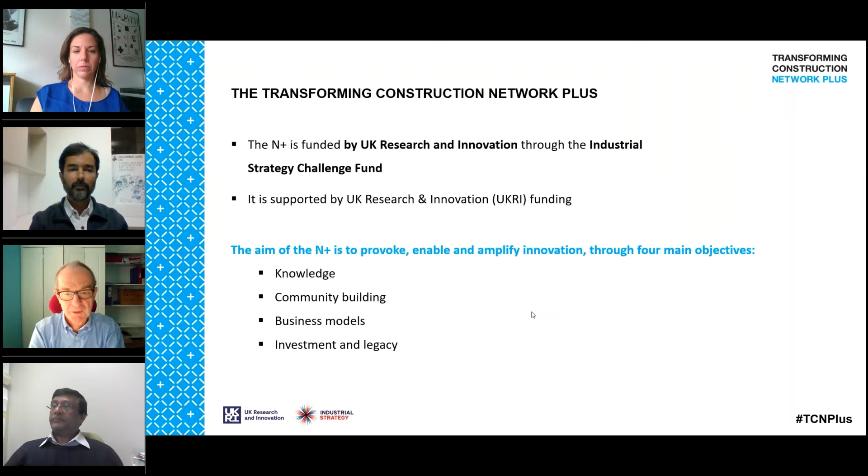So our webinar today is looking at the international experience around off-site construction and energy efficiency. And we have three speakers: Dr Thaleia Konstantinou from TU Delft in the Netherlands, Professor Deo Prasad from the University of New South Wales, and Dr Malay Dave, who is also from the University of New South Wales in Australia.

So without further ado, what I'd like to do now is introduce you to our first speaker. Dr Thaleia Konstantinou is an assistant professor and chair of building product innovation at the Department of Architectural Engineering, the Faculty of Architecture at Delft University. She studied architecture and qualified as an architect at the University of Athens, and she undertook her PhD at TU Delft. Her research topic is facade refurbishment and strategies, and she's currently looking at energy efficiency, the circular economy, and facade design, construction and industrialization. So at this point, I'd like to hand over to Thaleia to take us through her presentation. Thaleia, you have 20 minutes, and I'll give you a 3-minute warning.

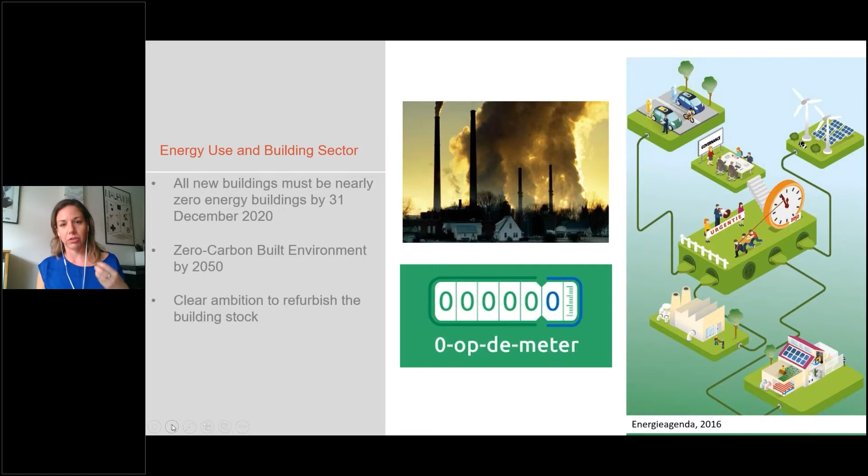And with this context, there's a clear ambition to look at the building stock, at the existing building stock. The reason for that is because we cannot really decarbonize the whole building stock if we do not look at the existing buildings, given that only 1% is added to the stock every year. This means that by 2050, when we want this to be basically not consuming any energy, only 30% of the stock can have the standard that we set now, while 70% is already there, and it has far lower energy standards. And that's what those graphs are showing.

That's a graph I really like. It shows that basically 80% of the buildings have outdated glazing, so less than 20% of the buildings have high performance double or triple glazing. And that's another graph showing the energy label distribution in the Netherlands. I wouldn't be surprised if the situation is similar in other European countries. It shows how the majority, for example, of buildings built in the post-war period, that's the blue bars, have a label of D or lower.

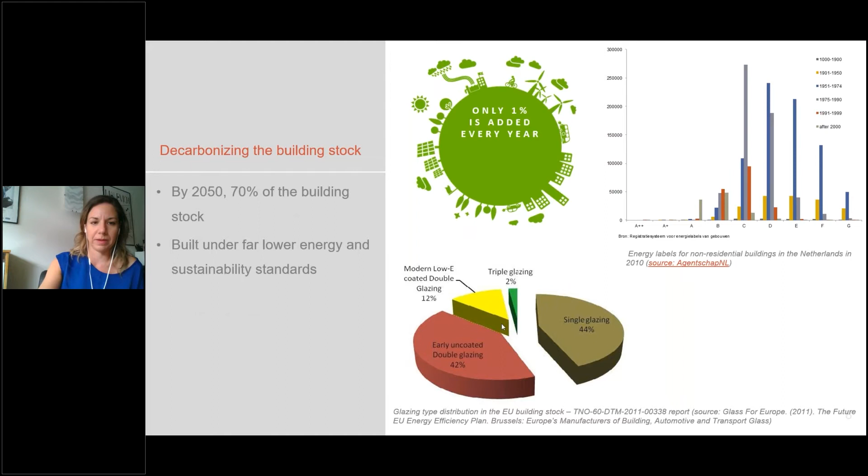Speaking of the stock, just to understand a little bit the age of the stock, because that's a decisive factor of the condition that it has: in the Netherlands, 1/3 of the stock is built in the post-war period. That's why it's an important period to look at. In the UK, this graph includes both countries, which I found interesting. The actual numbers are a little bit less, but still it's a very big percentage of the stock that is in this period.

The post-war building stock has been the focus in this refurbishment discussion, but we should also think that the next period, between the 70s and 90s, also needs attention, because those buildings are already 30 years old or more and are reaching the end — a lot of their components reach the end of their life span. So we see that we have a lot of buildings to work with.

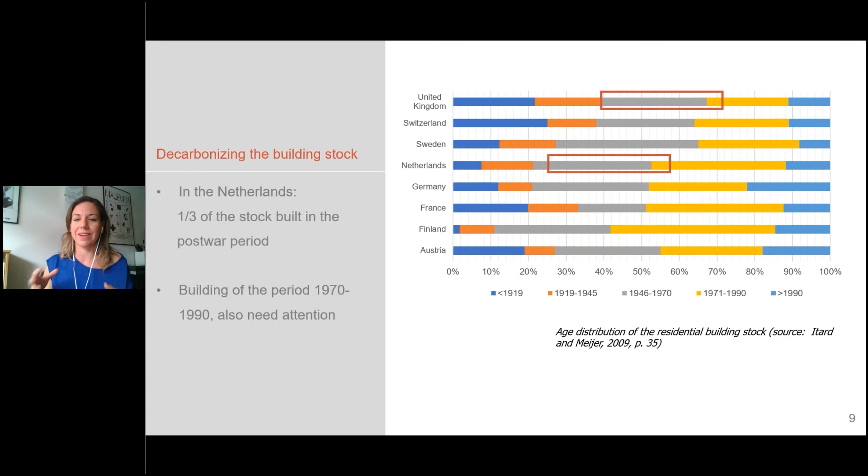So refurbishment does have the potential to increase energy efficiency, decrease energy use, and help reach all the climate goals that we have. However, at the current rate, this will not be possible. So both rate and depth need to increase.

That's a graph from a few years ago that indicates this. If we start with a renovation rate of about 1% of the stock being renovated every year, we need to get to 3%, with a projection by 2020 of almost double the rate of renovation. Unfortunately this is not the case - we're still not far above 1%. Maybe we are currently at 1.5 or something.

What is also important is the depth of renovation, meaning how much more efficient the buildings need to become. It's not enough to only replace the windows, for example - we need solutions that achieve savings of more than 60%, and ideally zero energy buildings. I'm going to show you in a while how this is indeed possible.

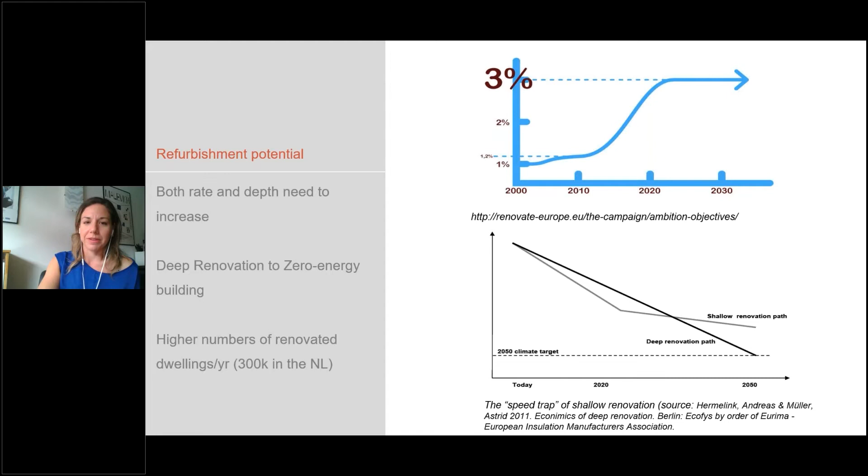So the numbers need to increase. In the Netherlands, it has been estimated that we need to renovate 300,000 dwellings every year to reach those goals. Given the high number of renovations needed, prefabrication and offsite construction comes into the picture.

Industrialized construction is often used interchangeably with prefabricated construction. However, these are not exactly the same - prefabrication is one subset of industrialized construction. We have other degrees of industrialization, like automation and robotics. But in any case, for industrialization to make sense, we need a high number of buildings. That's why it's relevant now, but also a challenge to achieve.

And industrialization is not a new concept. These are images from the post-war period, where industrialization was conceived as a way to produce a large amount of buildings needed for the reconstruction of the countries.

So these are all the systems used in the Netherlands, either with prefabricated large components, like in this picture - the system called VAM - or with smaller concrete blocks, the system called MUWI. But they all had the underlying objective of increasing the number of production. And as maybe we all know, this did not go exactly as ideal as people had envisioned.

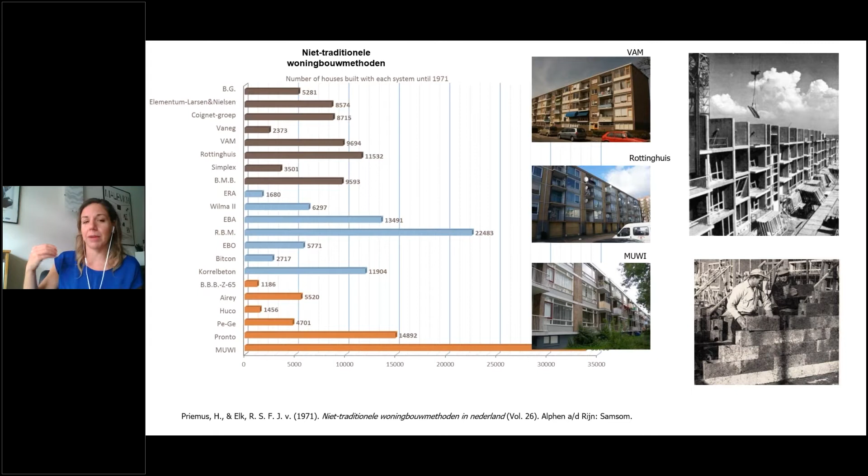So the question is not about repeating it, but how can we actually use what we learned and apply the things that are useful for us now. One thing that helps with industrialization in the stock is that there are a lot of characteristics that are the same, which helps with the replicability of the solutions.

So now when we talk about industrialized retrofit, it's not about repeating what was happening before, which was anyway for new construction. We need to use the potential that industrialization offers to increase effectiveness, productivity, and quality, while minimizing on-site construction time, which is important given that in refurbishment, in many cases, people are already living in the houses, as opposed to new construction. We need to minimize the disturbance to make the whole process feasible, because people need to accept it.

What is more important, and maybe new compared to past industrialized approaches, is that now with industrialization we have the chance to integrate more technologies, such as building services, but also reach very high standards of performance with the integration of a large amount of insulation or other materials that can achieve that.

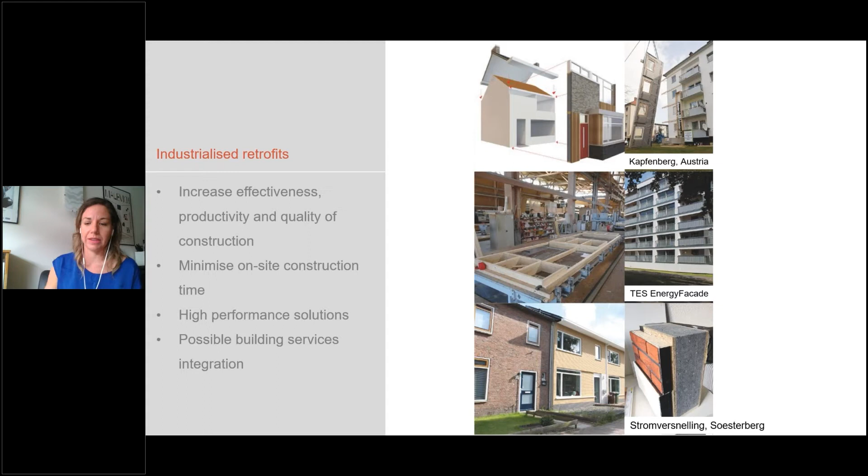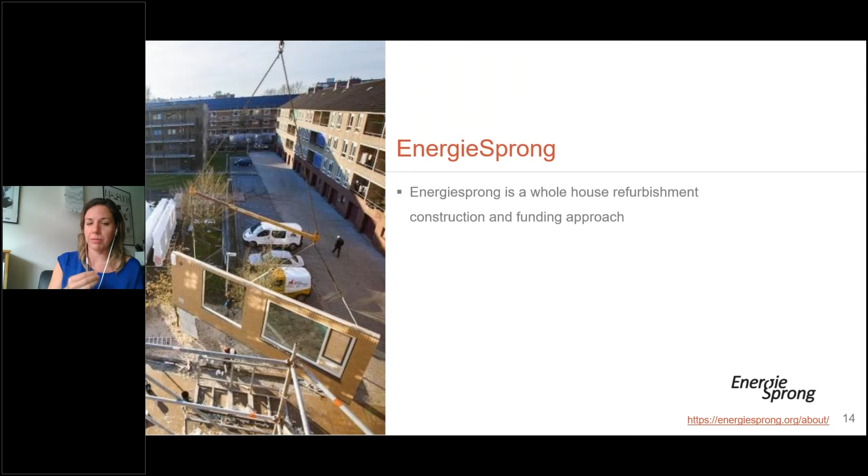So I would briefly like to mention Energiesprong, which you maybe have heard already, an initiative that started in the Netherlands. It's not something I have personally worked on, but it was developed at the same time as other similar projects we were doing, and we were in contact with the people working on it. Energiesprong is more an approach, a concept for whole house refurbishment - it's about the prefabricated construction, but also the funding that can make this renovation possible.

It's based on a long-term performance guarantee for the climate and energy performance. The business model is that the amount people would normally pay for energy bills and maintenance goes to pay off the retrofit.

At this point it's worth mentioning that Energiesprong has the objective of zero energy performance, or as we call it in the Netherlands, NOM - nul op de meter. It's not only zero energy for heating, but includes both building and user-related energy consumption, so also appliances, hot water, and so on. In the end, you have zero on the meter, zero energy bill.

It has been quite a successful project and has been internationally exported, also in the UK through the Transition Zero project, but also in other countries like France and Germany.

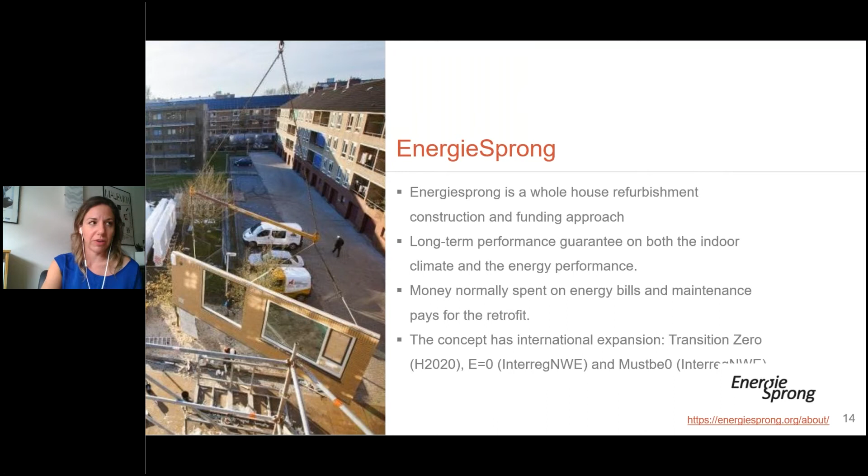This is one of the first cases, constructed around 2014, in a small city in the Netherlands, where they renovated row houses, 55 terrace dwellings, to go zero on the meter - the NOM standard. Both facade elements and the roof were prefabricated and arrived in one piece, already with windows and doors integrated. Those panels are made with a timber frame construction.

There is also an installation building services unit - a box put in the backyard that includes all the building services, which would be heat pumps and heat recovery ventilation.

This renovation took about 10 days per dwelling, including everything - reinforcing the foundation so the panel can go there, then about 1 day for the front facade, 1 day for the back, 1 day for the roof, and so on. So it was really, really fast and effective.

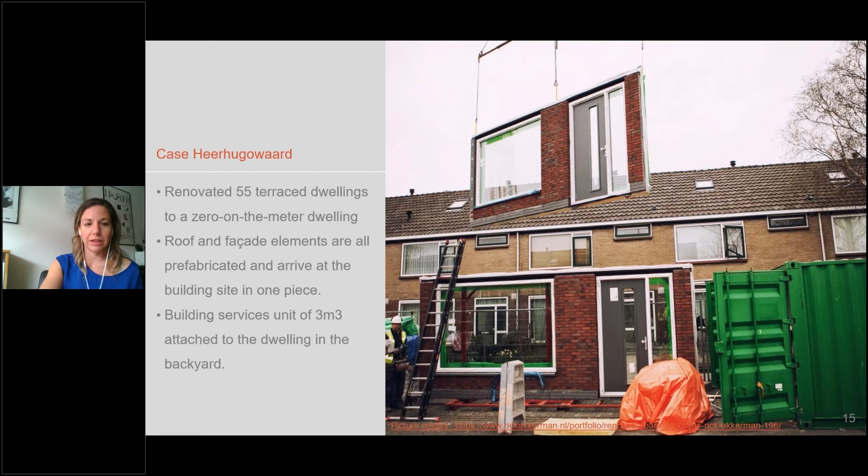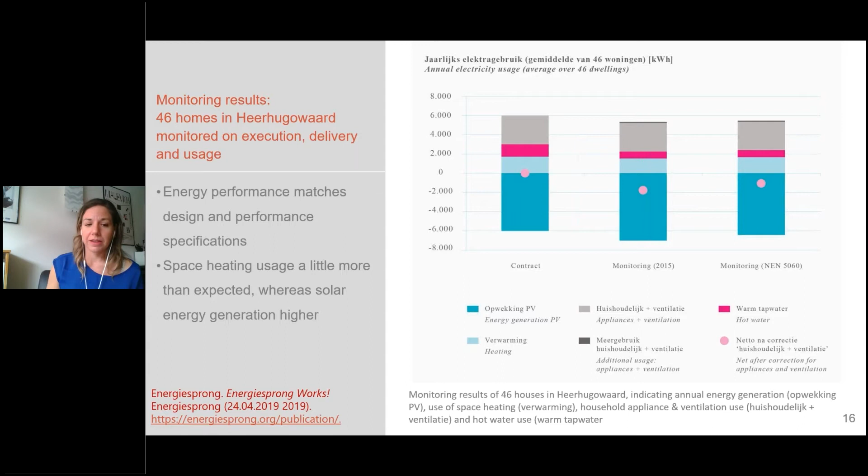Since this has been around for a few years, it has been monitored, and the results show that performance matched what was predicted during the design phase. Space heating is a little bit more than expected, and energy generation through solar is also a little bit higher. Overall it performs as expected, which is very important for the energy guarantee - a concept that makes the whole thing feasible.

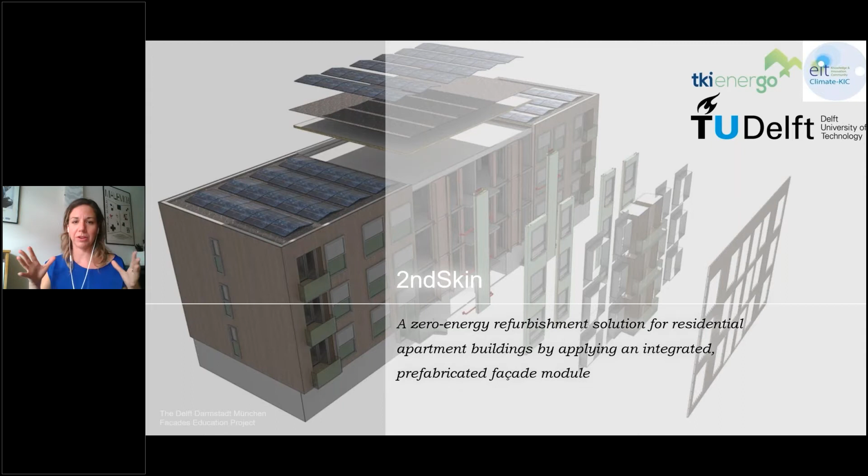That's also something we did in our project - a project I've been working on called Second Skin, not because it had a double facade, but because we envisioned putting a second skin on the existing building. Similarly to Energiesprong, we wanted an integrated approach - not only in the sense that all components are integrated, but that all aspects of renovation are addressed. So we have the technical aspects, about the technology and how to reach zero energy without intervention in the interior, but we also looked at business development and how to upscale it and bring the cost down, plus user aspects including acceptance and monitoring.

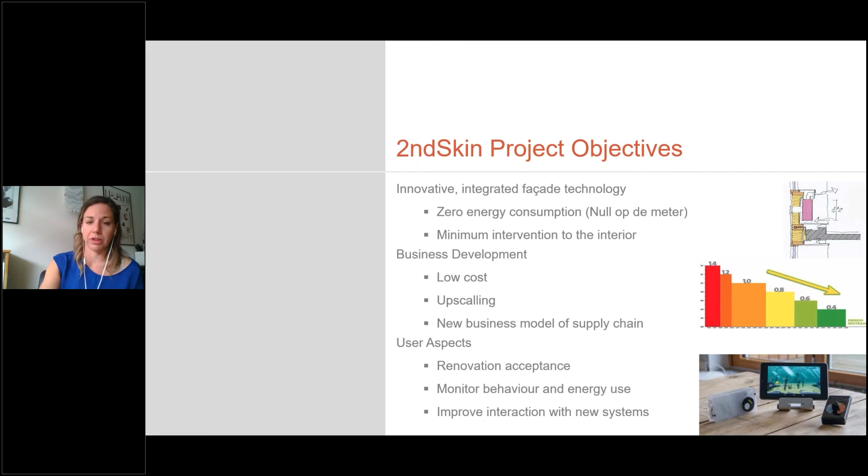It had different stages, starting with the mock-up. Then we have 12 zero energy buildings, and the last phase, which was more recent, had 120 zero energy ready buildings - so they were not zero energy, but could be upgraded in the future.

This approach of steps fitted our idea that we need to develop towards a product, and in order to innovate, especially considering industrialization, we can start with existing technology and see how it performs. When we have confirmed performance, it becomes easier to make more integrated building products.

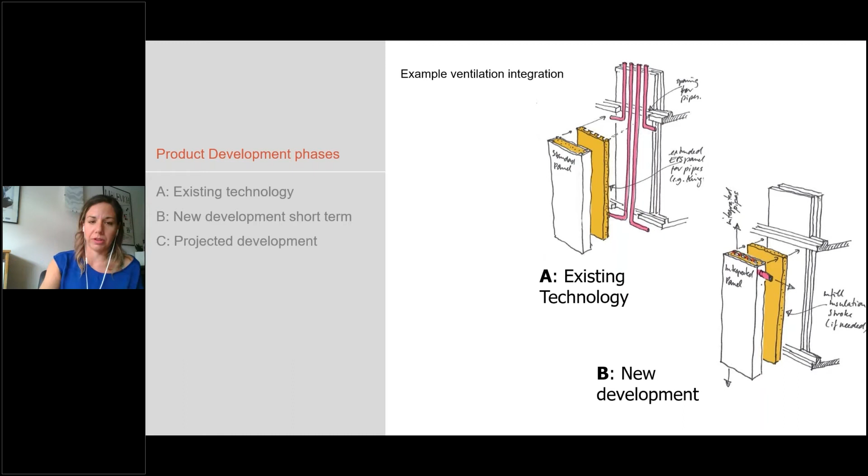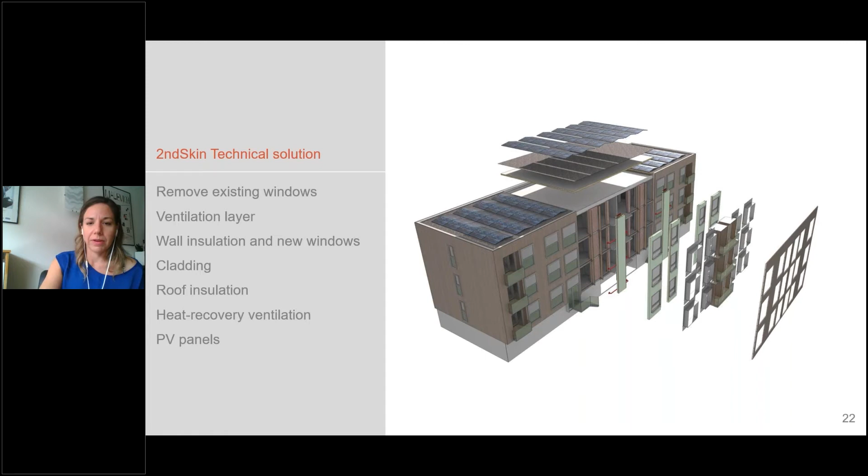I'll go a bit fast about the first phase. Our concept is quite straightforward: we remove existing windows, the walls stay, and then we have a ventilation layer, where the ventilation pipes for heat recovery run, connected to the unit in the roof. Then the facade panel consists of sandwich panels, attached to the existing construction through wooden beams, and the PV panels are on the roof, not visible in the facade - although there is the possibility to add them to the facade if needed, since there is a separate cladding on top of the sandwich panel.

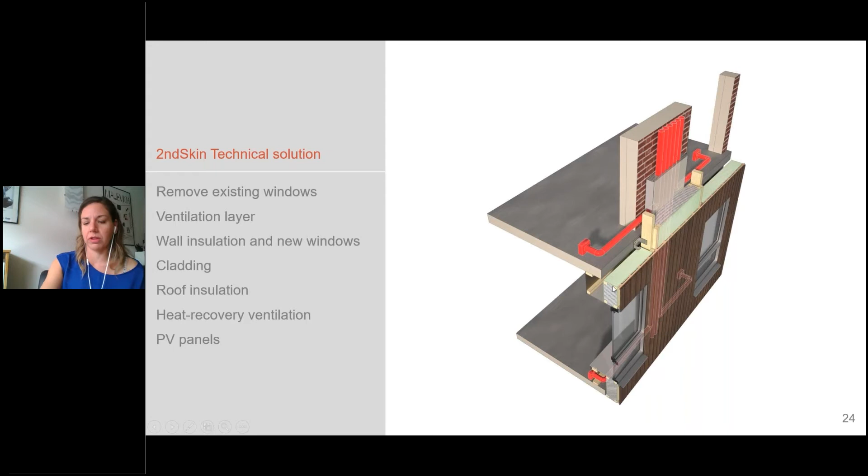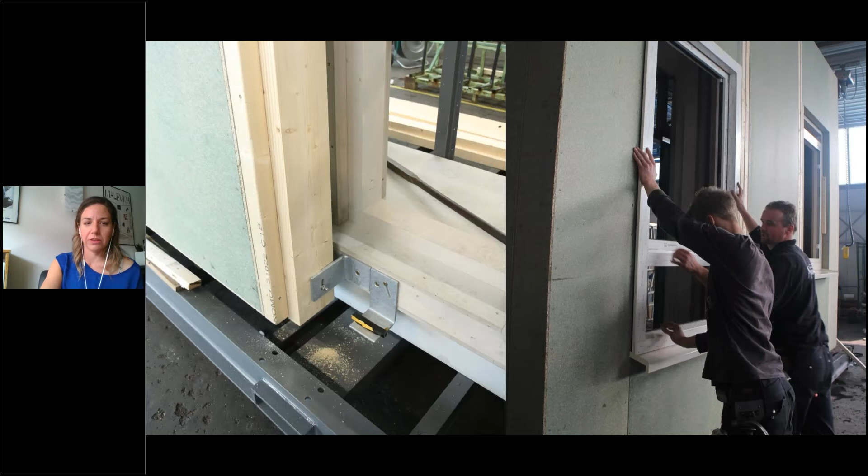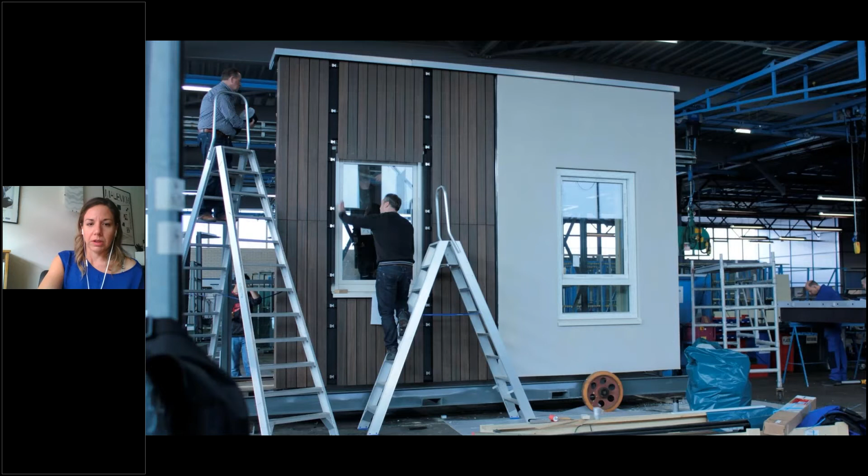We made a mock-up to test the technical feasibility. These are some pictures of how this looked, the connections, how easy it is to assemble, and how many people are needed. That's the inlet for the ventilation pipe into the space. We also tried some different types of cladding.

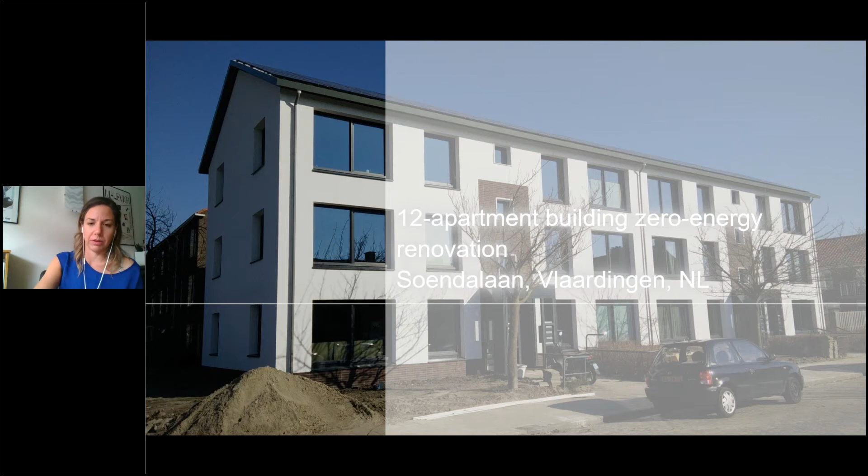With those findings, we went to the next step, actually applying it in a real project - a block in Vlaardingen, a city in the south of the Netherlands.

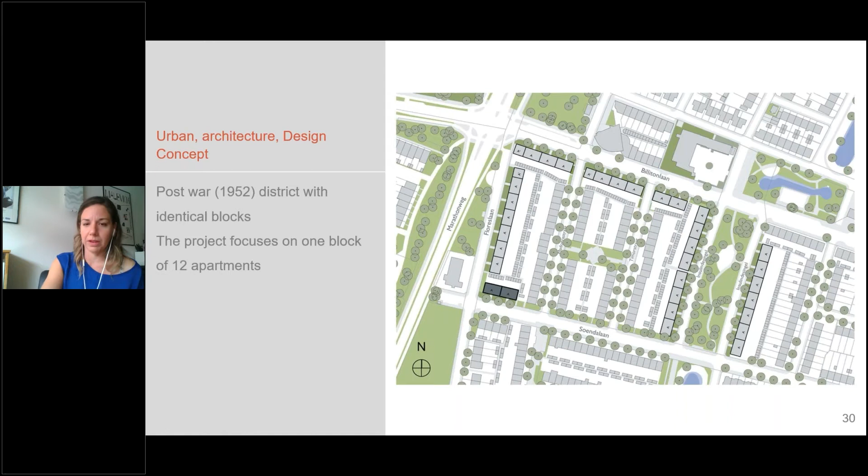This building is a very typical post-war district. This is the building in question, but all those buildings are exactly identical, and actually those are the ones that are renovated in the next phase, in the zero energy ready phase of the project. Those buildings are constructed with the industrialized construction system called Simplex.

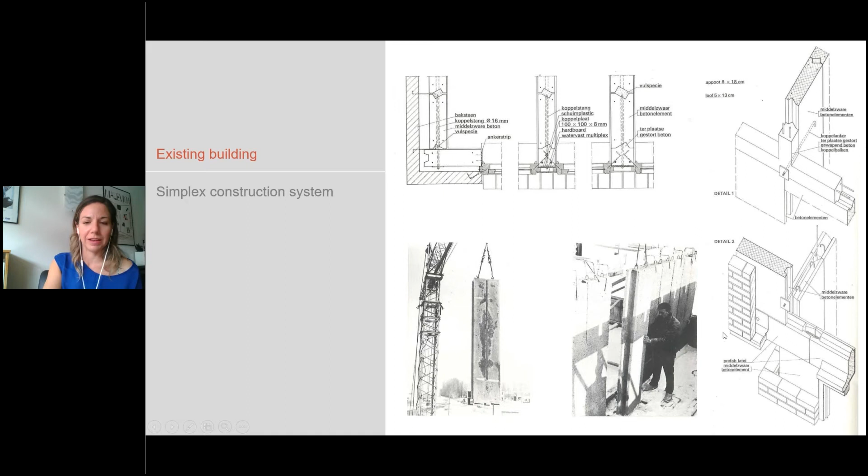These are some historical pictures and drawings. So we have these prefabricated concrete panels that make up the walls and floors, and brick cladding to give a more desirable image. So that's how it looks. These are, maybe to mention, rental apartments, and the whole district is owned by a housing association.

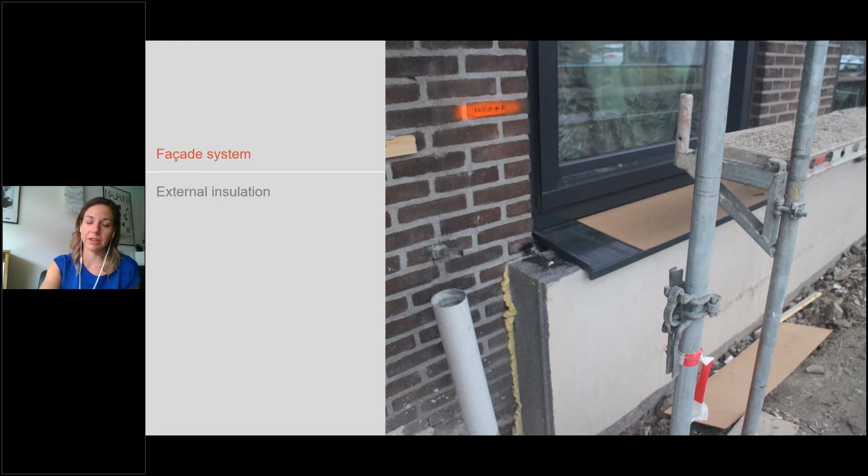So that's a little bit to our disappointment for the process, but that it had to be built, and we still incorporated a lot of the things that we learned from the first phase there. But to some extent, the first phase was more generic in design, and now it had to be more adapted to the specific project and the specific conditions of the project.

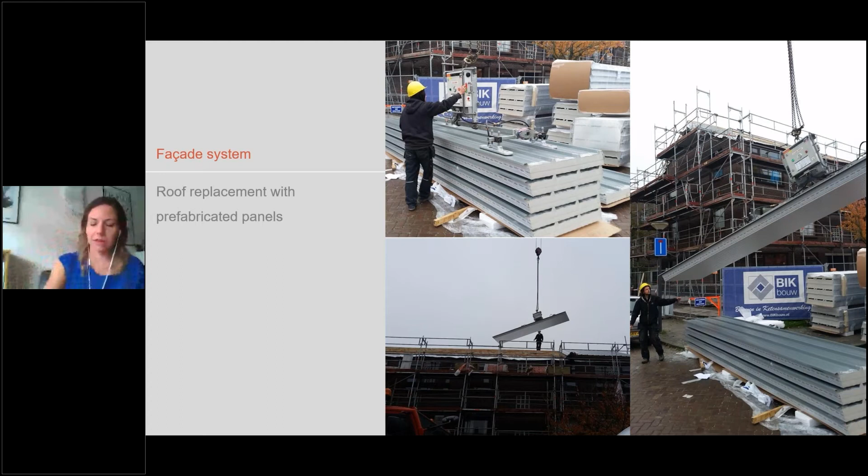The windows are replaced with triple glazing. And the roof are indeed prefabricated panels, so the current tiles were removed, the structure stayed, and then the existing wooden beams stayed, and the prefabricated roof panels were attached there.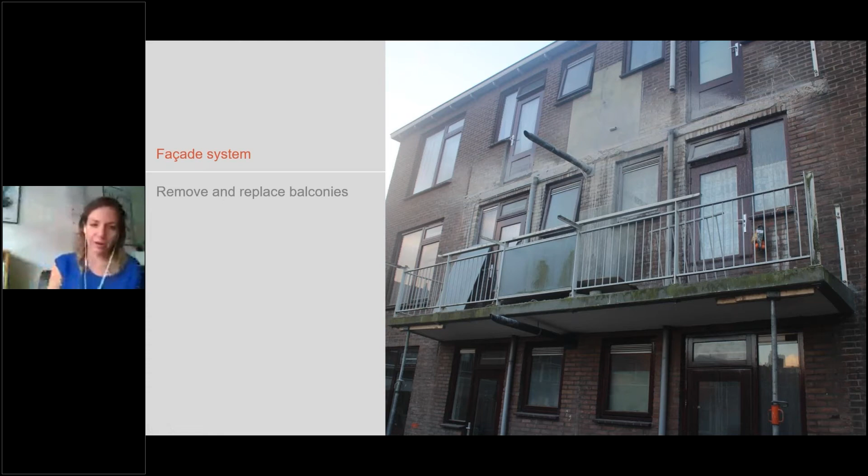One thing that was interesting about this project was the balconies, that it was decided to cut and replace them. This is so that the insulation could run through, but also have a new and bigger balcony. So that's the phase where the first one was cut. A few minutes later, that one was cut.

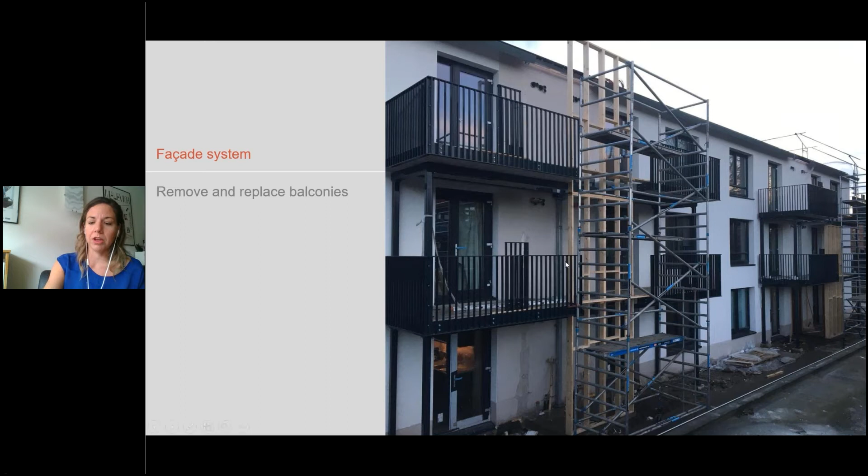That was one of the biggest interventions, and also one of the biggest expenses in this project, because this new balcony required new foundations. But it was also, apart from giving added value to the building, giving the possibility in this part to construct a prefabricated box that included the building services.

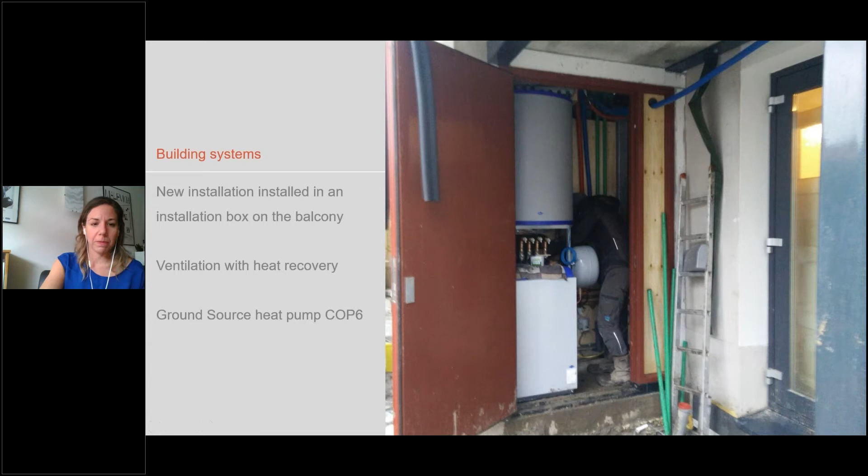So here we see the heat pump and the water buffer. Also, it's not there yet, but there's also a ventilation unit with heat recovery. And the ground source heat pump - the heat pump is a ground source heat pump with a very high COP of 6. This is from when the hole was dug.

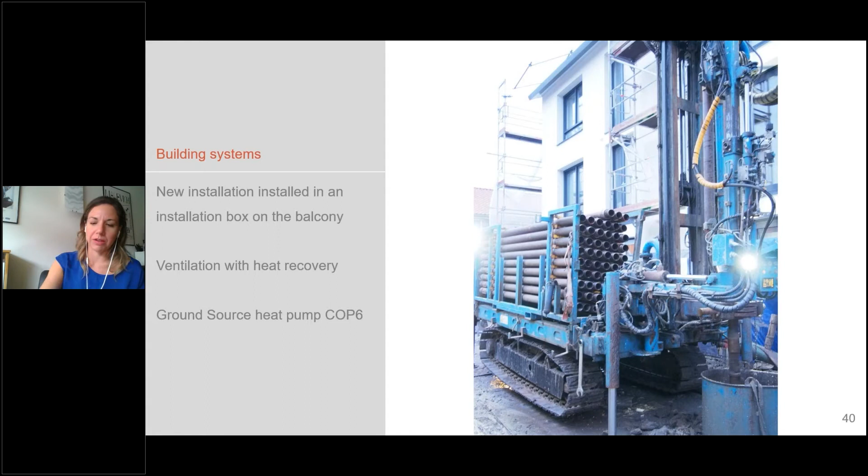It went down all the way to 190 meters. That was in the backyard. That was again one of the main, one of the big expenses of this project. And that's also something specific to this project, because not all projects will have this backyard and will have the possibility to have a ground source heat pump. But it was a very efficient solution.

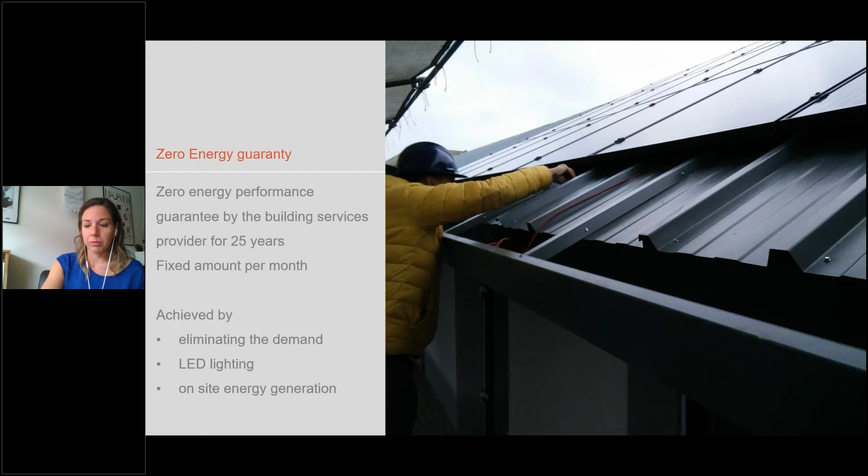So in combination with this, with the photovoltaic panels that were installed on top of the roof panels, we were able to give a zero energy guarantee for 25 years. So that was one big factor that made this project feasible.

So how it worked is, this is a slide that was communicated to the people. The people continue to pay the rent, of course, but instead of paying the energy to the energy company, they pay an increase in the rent that is regulated through the government through what is called the energy performance subsidy, which is a fixed amount. And then if there is extra energy needed, they pay at the end.

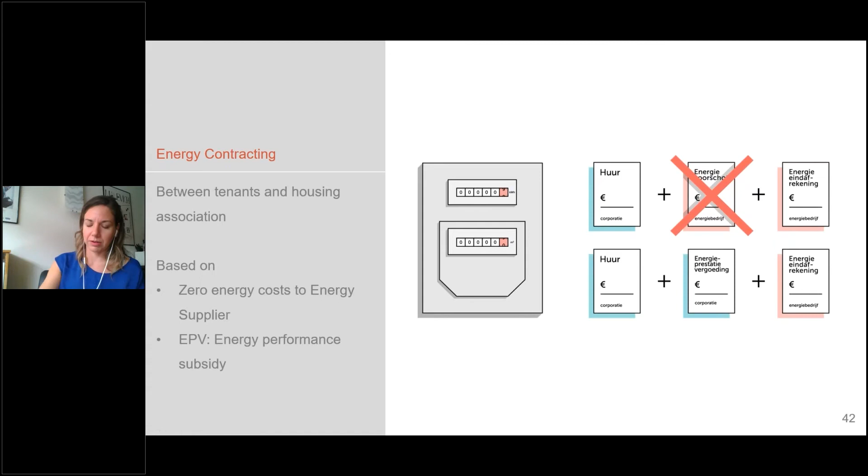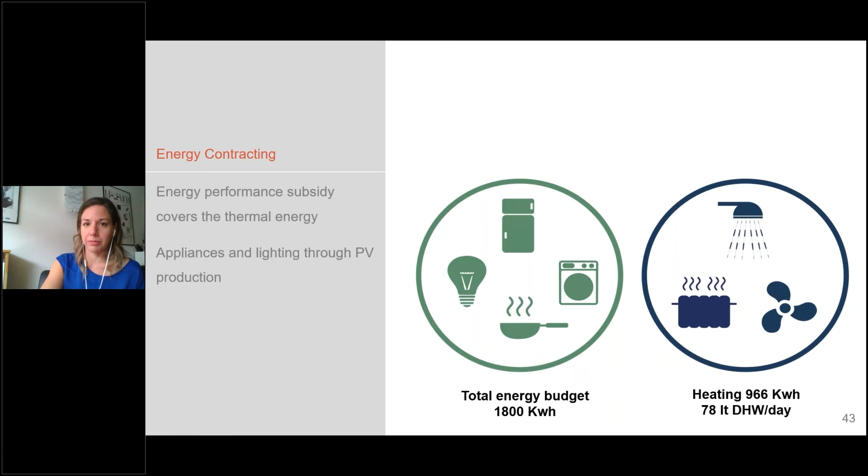So with this subsidy goes to the housing association, and with this it can cover the investment that the housing association as the owner made. And then the occupants are given specific budgets for energy, defined by the performance guarantee and the contract, the agreements between the parties.

So what's interesting is maybe the business model, in that case we have the general contractor who made a construction and maintenance guarantee with the housing association, the owner, but also organized the whole process of construction. But there's also a separate party that provided the energy performance guarantee. So the owner had to deal with two different parties.

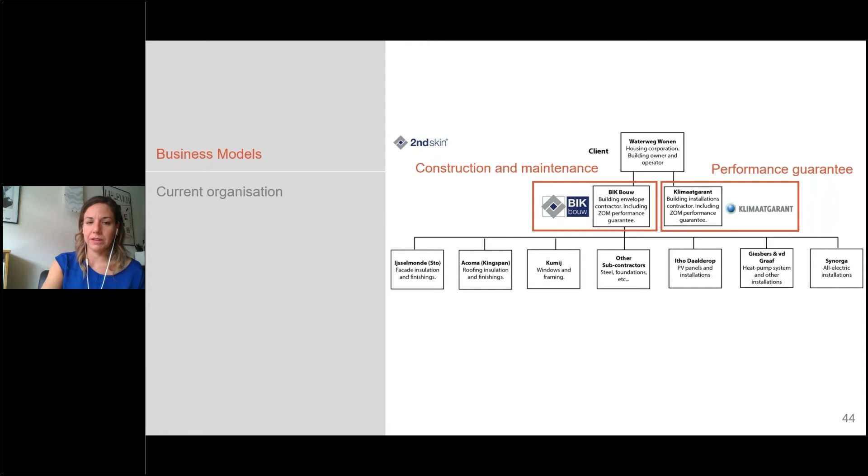One suggestion that we want to make is to change this supply chain organization, even though more or less the similar parties are involved, so to form one, in a way like a one-stop shop, where the owner has to deal with all the performances, instead of having to arrange this with two different parties. So that's one improvement that we want to make, and we are on our way there. The general contractor, BIK Bouw, is leading the process, and the new company.

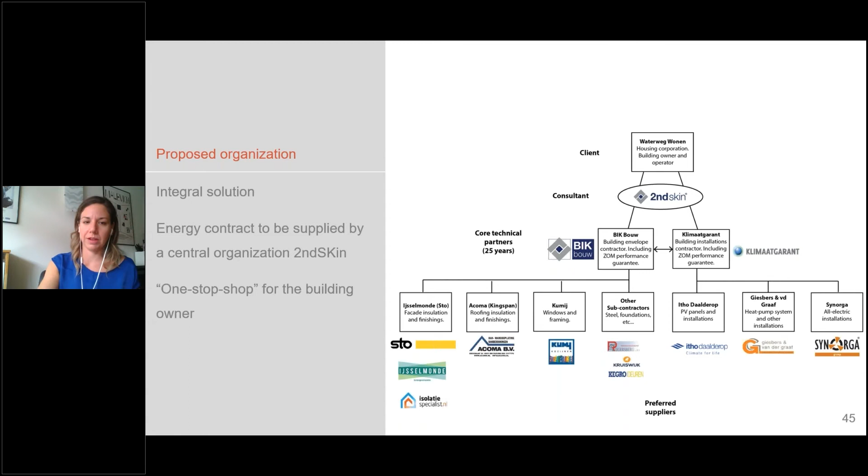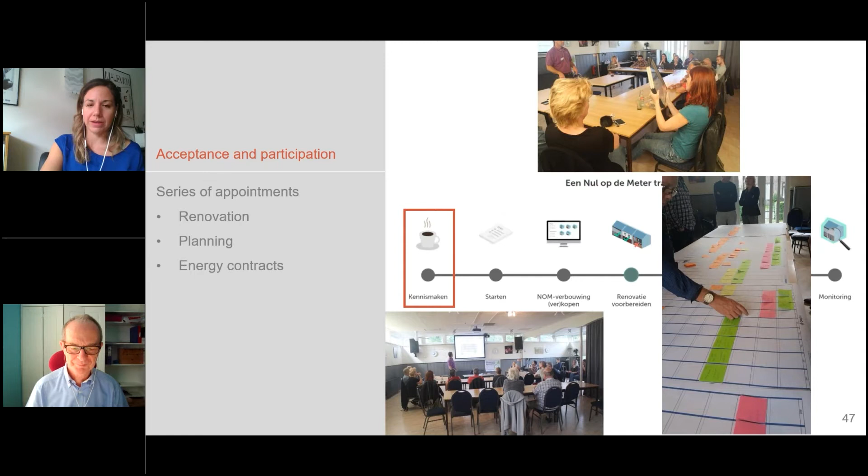Just to highlight the role of the users, because that was an important part in our project. The users first had to accept it, and they were together with us in the whole process. With this, we managed to have a very good acceptance of 100%. They were there during construction, and there were absolutely no complaints, even though it was an inconvenience for them, because they were informed and the timelines were kept.

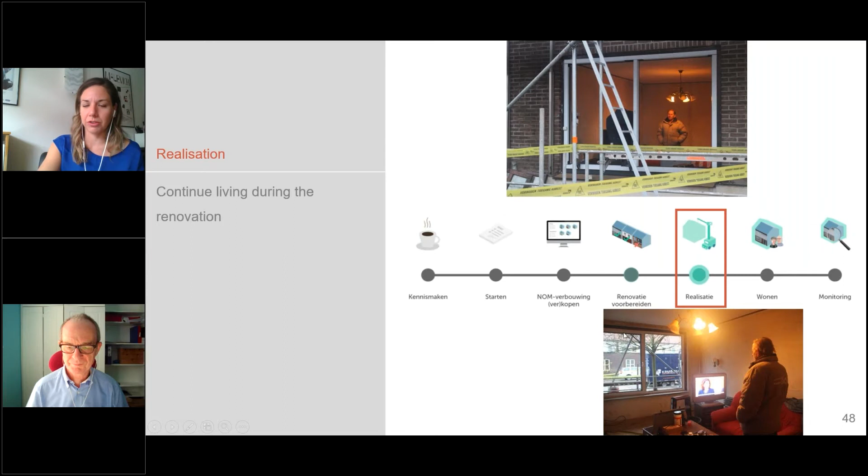So we see this gentleman here watching TV while his window is being replaced. And now it's being monitored. I don't have all the results yet, but I can already say that the energy production is more than it was initially calculated.

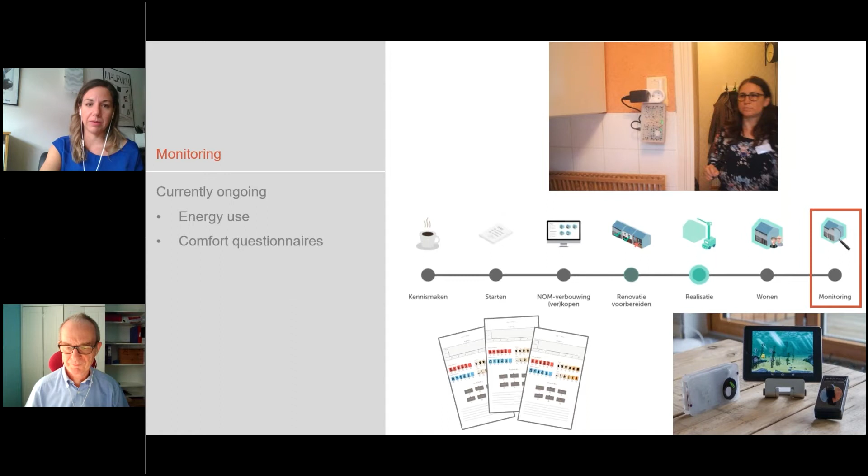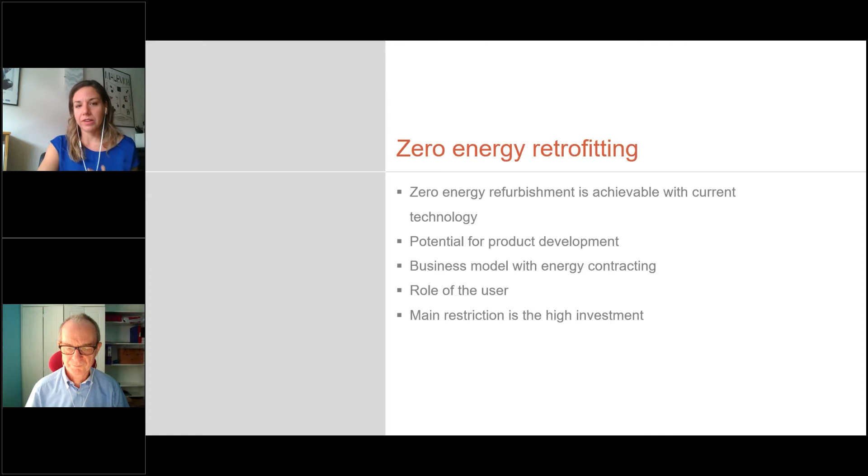As an outlook, I think we need to see how, with this increased number of renovations that we have to do, industrialization can come more into play, because it's still not the current practice. It's more in a kind of pilot way. If we increase that, there is potential to also bring the prices down, and also make the whole process faster and increase the numbers.

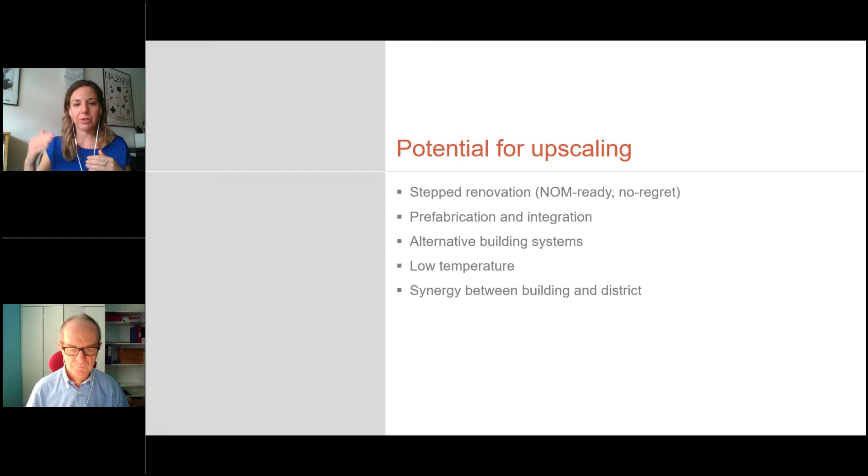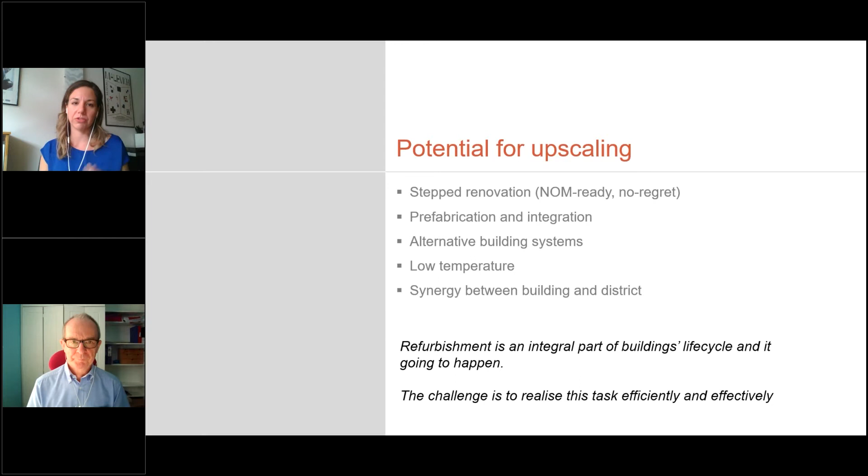We also need to look at alternative solutions like stepped renovation, or how to combine it with low temperature energy systems and so on. One message to live with: refurbishment is something that is going to happen because it's part of a building's life cycle. What we are looking at here is how we can make this more efficient and effective to really achieve zero energy solutions and address our climate goals.

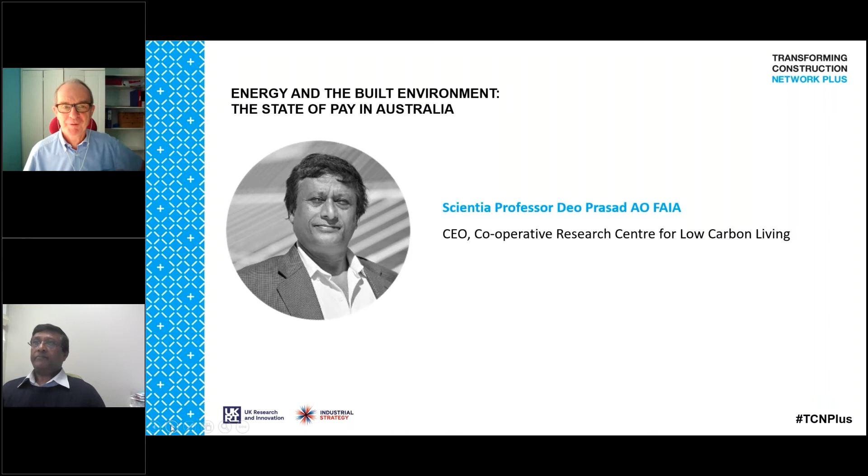I'm trying to get my slide to change. Okay, it changed. I'm not sure if I managed to do it or if it was done remotely.

Things I will cover include some mandatory measures in Australia in terms of energy in buildings at time of design and so forth. Energy issues are more state-based. In Australia we have the federal government system, state and local government, so most of these are state government issues. I'll also mention some voluntary measures driving change, a relatively new initiative driven by climate emergency, which has gone global, but I will talk about what we are doing, which is also driving change in this area.

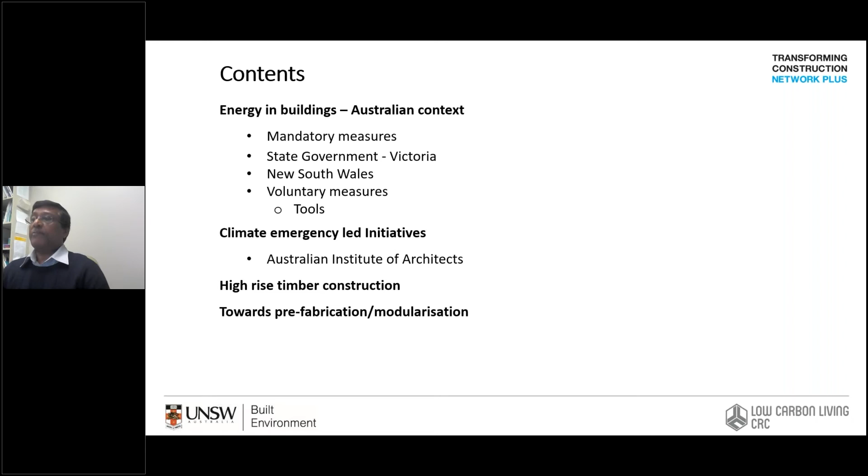A lot of that is leading towards more efficient ways of construction. I'll give a few examples where timber structure in construction has come about and been trialed and tested to work well, and also put a lead in towards prefabrication and modularization, which my colleague Malay will take on.

So to start with, let me talk about my university here, New South Wales. When you look at driving towards zero carbon and low energy buildings, in our case a precinct at a time, the entire campus, we at the university decided to go down that path of zero carbon very quickly. Obviously you try the level to which you can get cost-effective demand side efficiency, then explore how much renewables you can get on site, and what role storage can play, and then look at offsite.

And we went through the process and ended up with a very large offsite generation facility, which the university invested in, working with a utility which has all the poles and wire access, if you like. The site is very far from the university, about 1,000 kilometers away, but we then get it to the campus, well, offsetting our energy through green renewable generation.

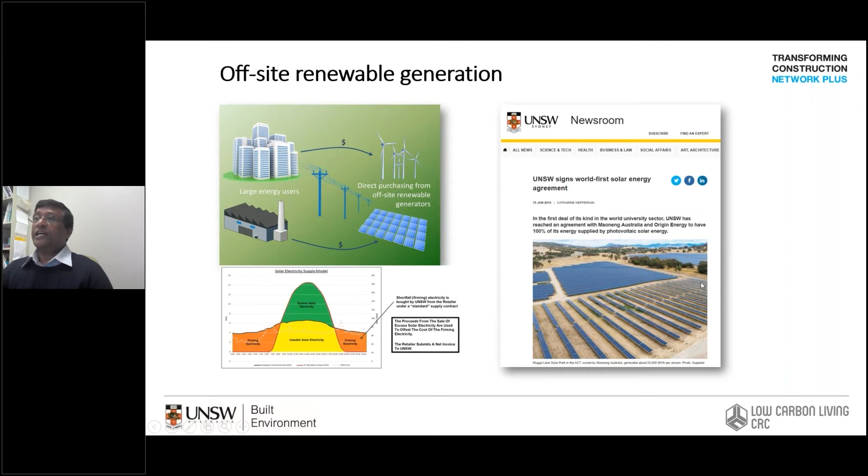So if you look at the graph here, the total generation offsets the total demand during the operational phase, and that's our way of quickly getting onto zero carbon. There are better ways, both through refurbishment, and Thaleia has mentioned a number of approaches that she and in Netherlands they have been following, but this is just a quick way of driving precinct scale change.

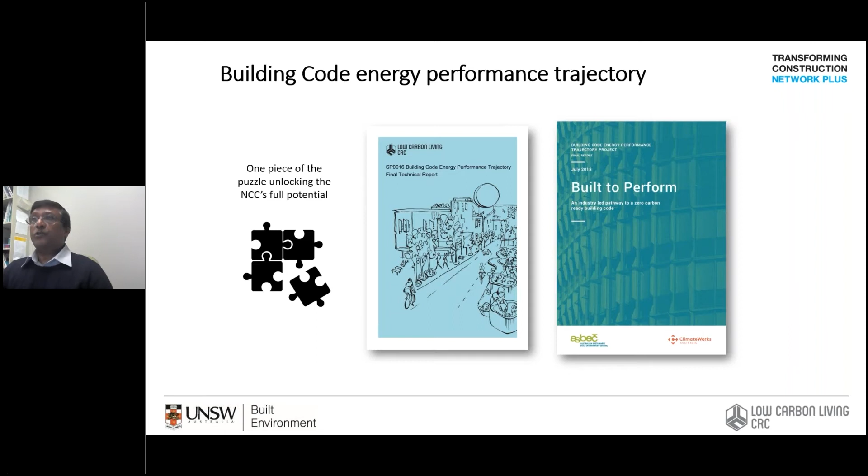Within driving change, the Building Code of Australia is a key mandatory approach, and we have had a poor record in terms of having a building code that drives low carbon buildings. In more recent times, we have had residential house energy rating systems, and in commercial, we've been looking more at the system side of things, but they have been successful only to certain degrees.

What my center recently did, which is the report here on the left, looked at a trajectory approach where we look at the business case and the technical case for going down a pathway 10 years at a time, so that you can actually know what the next 2 or 3 changes might be that drive us towards zero carbon. It gives you the confidence, obviously, of knowing as a manufacturer what products might be needed, so you can innovate for products and systems and technologies, but at the same time progressively meet compliance towards that trajectory and pathway.

So this is now approved by the Council of Australian Governments, and we are soon going to have a trajectory approach embedded into the code, which is a really good way of moving forward. That will drive all types of construction.

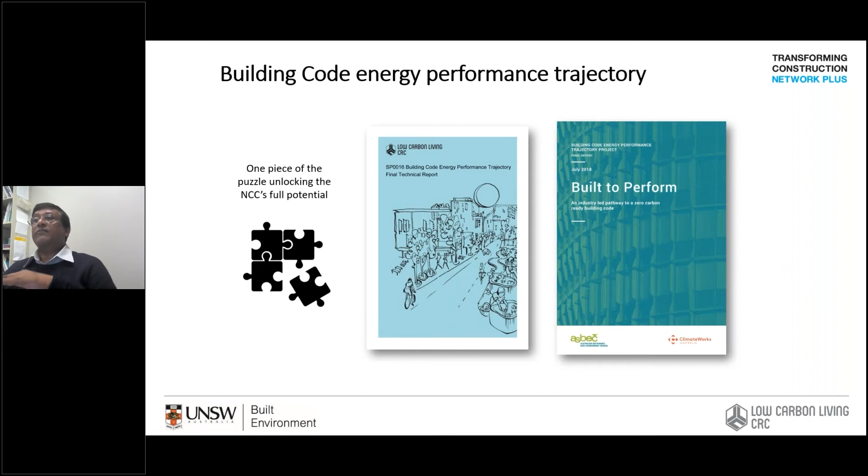We within our research center have also looked at actual demonstrations, building a house at a time with real-time families, to look at how you can achieve zero carbon without that much of a cost penalty. This is a house called Josh's House. It's available in terms of live performance on the web. If you just put down Josh's House, this shows a family of 4 can easily do that in a normal-looking suburban house in Fremantle.

And we collected a lot of evidence through a number of other living laboratories where we demonstrated zero carbon is achievable cost-effectively within different climates in Australia. As you know, Australia spans a very tropical north to a very temperate and cold south.

And collecting a lot of data, we fed into the government, and in this case, the Victorian government has started with a policy enabling zero carbon, working with larger developers to give them subsidies to drive change towards zero carbon. So having collected the evidence, we're trying to apply it to drive policy, in other words.

We also, in New South Wales, looked at other ways. In this case, they were interested in the role of behavior. You can design a 10-star building, but if the people are operating at 2-star, you will only get a 3-4-star performance. So we looked at the role of behavior, and a number of projects we did were directed towards better understanding how people behave and how you can intervene within that.

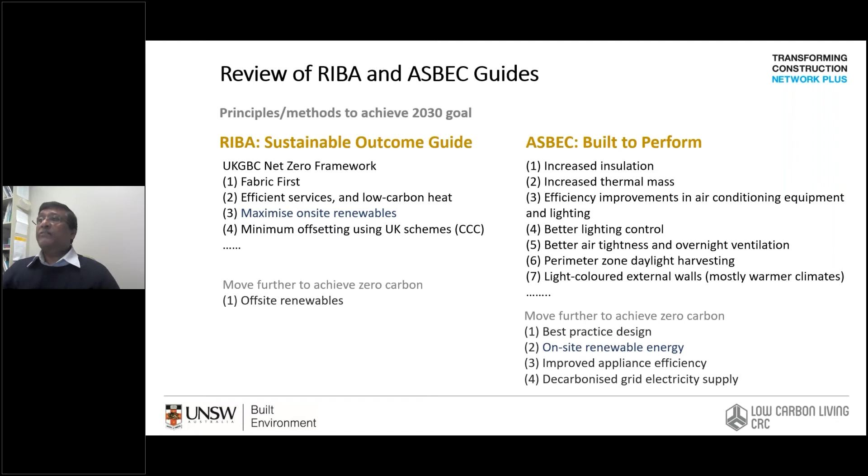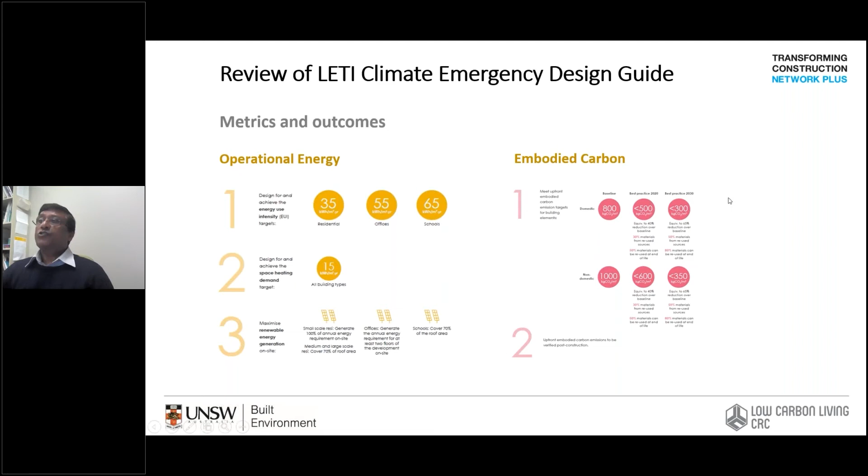We developed a number of parameters and metrics that we want to look at. And even the London Energy Transformation Initiative has developed a guideline which we looked at, and we are at the moment trying to develop our own guidelines from all the evidence we have collected, but at the same time looking at what others have done to drive towards zero carbon pathways.

A number of buildings have evolved that have taken these high levels of stringency in codes, as well as tighter envelopes and things.

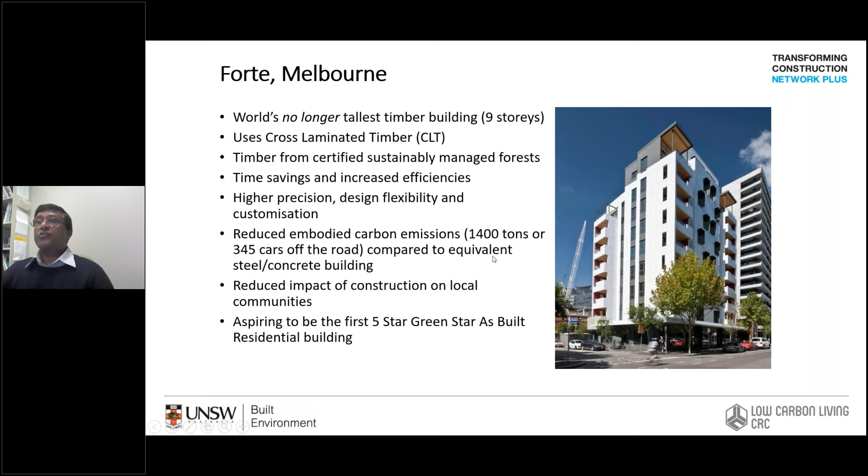And there are buildings. This is a 9-story building from a few years ago, 5-star ranked, and we have International House. These are all timber framed, which enables it to be a lot more driven by modularized construction, managing waste at the same time.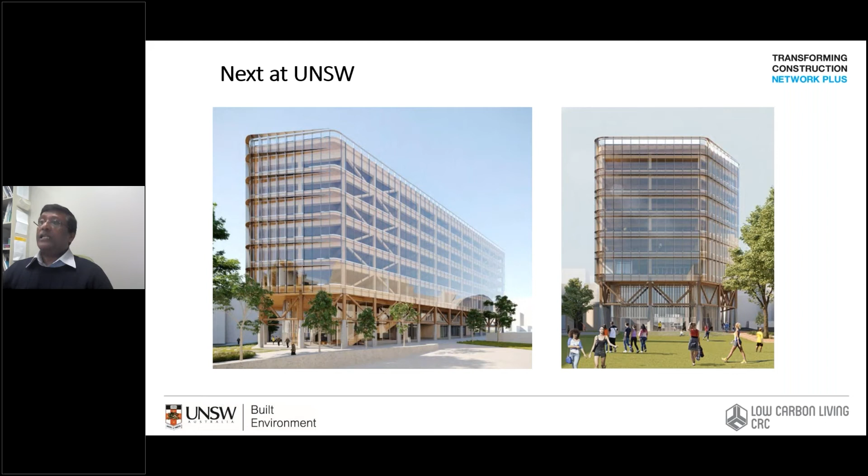What we have done is produce a lot of guidelines for renovating as well as new designs, and these are widely available in Australia. Even earlier today in a government workshop, we made these available for them to take on board and take to industry more widely.

So that we can engage industry and others in enabling low carbon and more efficient construction. So I will pass it on to my colleague, Dr. Dave, and Paul may wish to introduce him. Thank you very much, Deo.

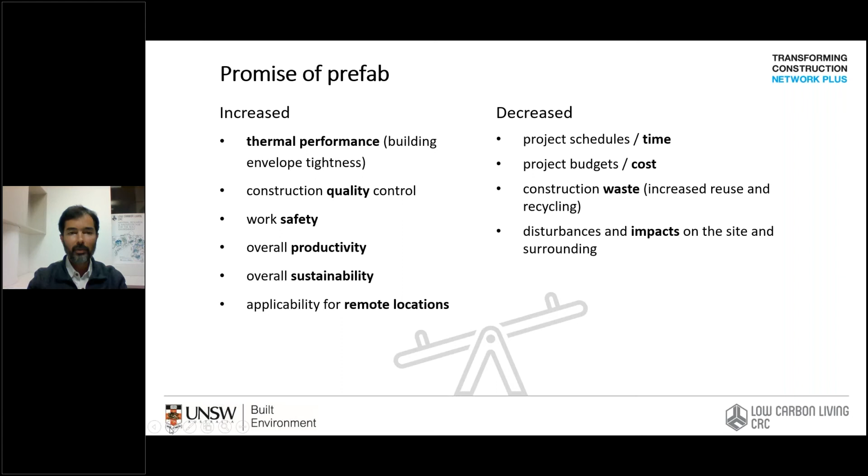So this is quite well known. Prefab, or offsite construction as it's also called - I will for consistency use the term prefab throughout my presentation - is well known to provide some key advantages in construction. That includes increasing performance on sustainability, increasing quality, greater control on the timeline, and reducing costs and waste. So this is the promise that we all know quite well.

However, the reality of prefab is slightly different to that. Throughout the research I conducted as part of my PhD, it's internationally quite well known now that it's not necessarily the case. It is still struggling with some barriers.

I want to highlight two of the key documents that came out, one from UK and one from Australia. Both were Vision 2020 documents on construction, and how to advance construction to achieve high performance and to achieve the goals we want to see environmentally, from a productivity point of view, and cost. Both talked about prefab or offsite construction as one of the key pathways to achieve this performance in construction.

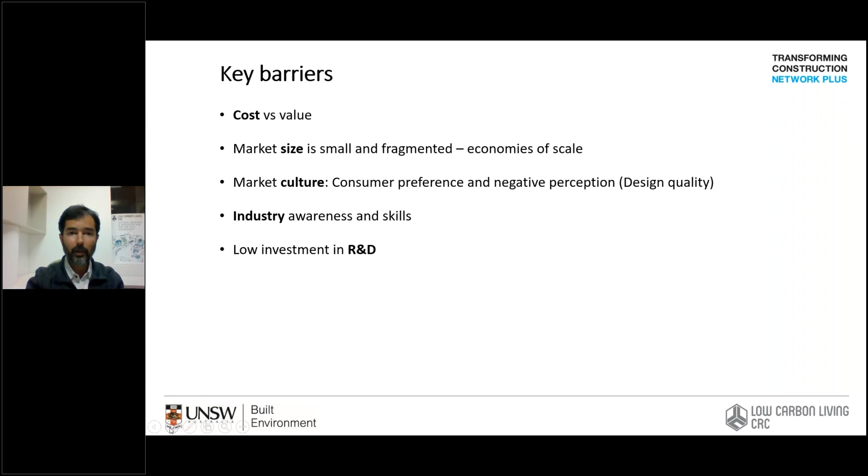Actually, the initial cost is still considered to be higher than the traditional or conventionally constructed on-site building. Although the cost is actually one of the key advantages that may be achieved, we have not yet developed outstanding evidence that this is happening in all buildings. Actually, the majority of the construction is finding it as a barrier to achieve high performance.

Another associated aspect of cost is the value. There is a perception in the society that the initial cost reduction is the paramount aspect, and that then compromises on the value, and that creates a major issue with prefab deployment and acceptance.

Associated with that is another barrier, which is related to economies of scale. Prefab achieves reduction in cost primarily through achieving economies of scale. If we cannot have a large size of market and high degree of repetition and standardization, economies of scale cannot be achieved, and hence the cost remains a barrier.

To achieve high economies of scale, we need a high take-up of prefab, which is not happening because of the negative perception within society. This is again a universal phenomena, but definitely in Australia we have what we call demountables, old modularized metal constructed school buildings that are quite well known for being very low quality in terms of thermal performance and aesthetics. That has created a lot of negative perception, and that is also having an impact on acceptance of prefab.

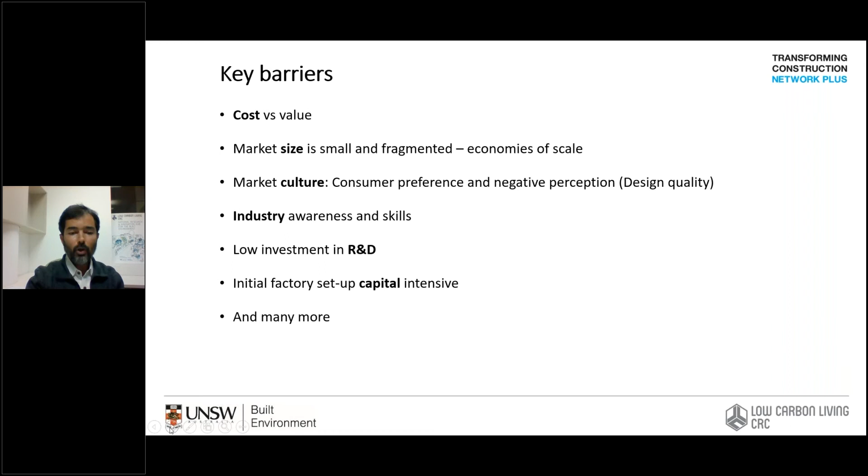So I want to talk about one project that we worked on here that tried to address some of these barriers. This was the project we worked on. A company called Nova Deko, a modular housing company based in Australia, however having fabrication facilities in China, approached us. They wanted to develop very high performance modular housing that was highly environmentally sustainable, but also economically affordable, primarily for the Australian market to start with, but also potentially internationally applicable.

We looked at design as a central aspect to address a lot of issues. We conducted thermal performance simulation-based parametric modeling. We did LCA studies, also on-site monitoring of their existing designs, and quality assurance studies within their factory in China.

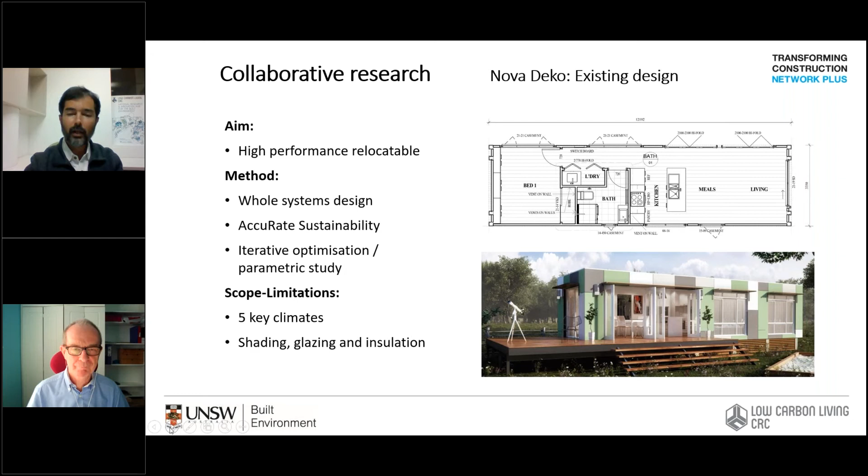What I want to particularly touch upon today is the aspect that modular housing or prefab of this nature struggles with a particular challenge that is quite different from conventional buildings. Conventional buildings are designed for one site or project at a time, while prefab has to address multiple climates. Australia has very different types of climates, from tropical hot humid to very cool climates.

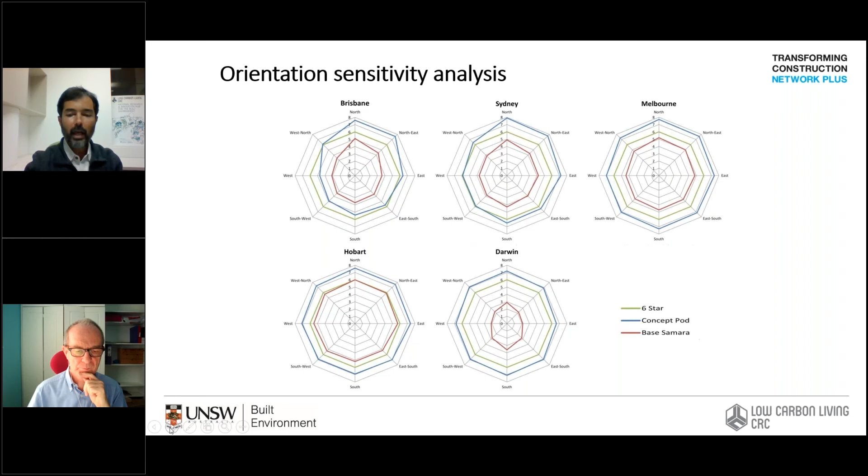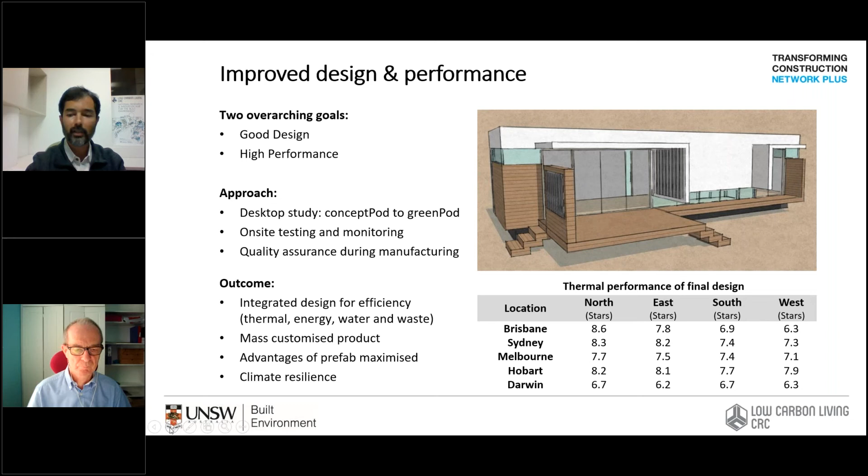So we conducted sensitivity analysis and came up with a final design that was able to achieve high performance on all different climate zones, achieving not only regulatory compliance, but going quite beyond the high performance mark that the company was expecting. So we were able to achieve a mass customized product that was able to achieve very clever changes within its design to address the climatic response requirements as well as client requirements.

I'm reaching towards the end of my presentation. I want to quickly touch upon the recent challenges we have experienced in Australia due to market forces and some economic turbulences. Within the last few years, many companies have closed down their shop. Either they have downsized or moved overseas or suspended their operations.

What this essentially talks about is that good design and high performance construction systems are not essentially going to guarantee the success in prefab. There are many factors, including business model, market forces, social acceptance, and many other factors that are quite important to consider.

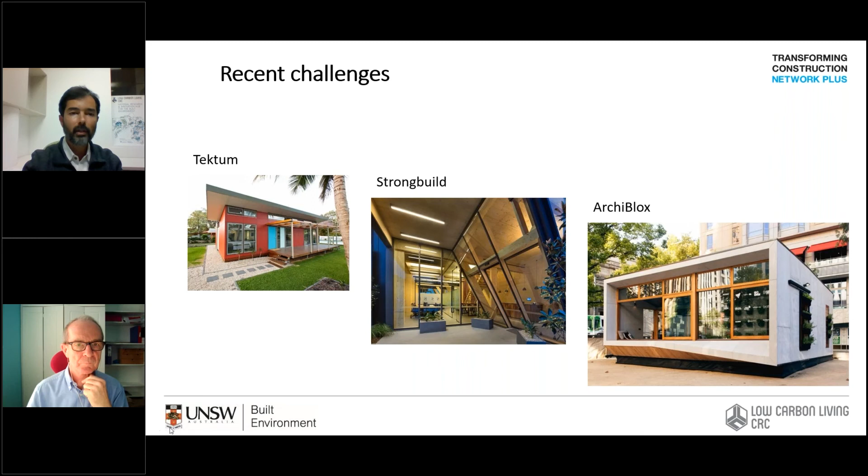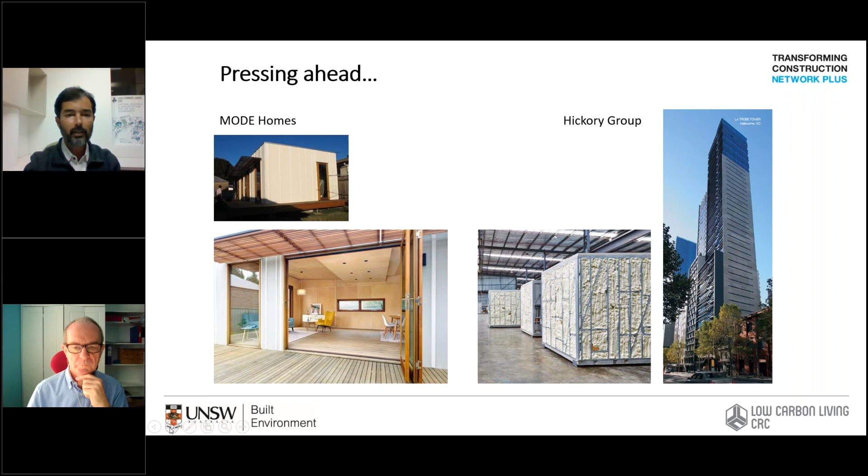On the right-hand side, you can see the highest modular tower, a 44-story tower in central Melbourne that they have built recently. So a lot of work and innovation is still happening, and the future is actually quite bright, particularly also—this is my last slide, second last—there is a lot of work happening in different institutes and organizations.

We've talked about CRC for Low Carbon Living. There is an ARC Center for Advanced Manufacturing for Prefab Housing at Melbourne University. There is the Zero Energy Mass Custom Homes Network. Also, there is prefabAUS, which is a peak body driving a lot of research in this area and community interest. The Advanced Manufacturing Growth Center has recently received a lot of funding from the government to establish an innovation hub in this area. And the Building 4.0 CRC based at Monash University is an upcoming research hub that will drive a lot of innovation in this area.

So coming to a conclusion, there are five key insights I would like to share with you. First, there is a need for much greater collaboration between industry and academia in this field. Industry has been quite risk averse in Australia in taking this up, but there is a lot of opportunity there.

Second is the greater emphasis on R&D that requires a lot more investment from the industry side as well as from government. We need to look at affordability not just as initial cost, but look at the value at a life cycle stage. Sustainability has to be considered holistically—it has to be embedded within the system level rather than as an add-on to buildings.